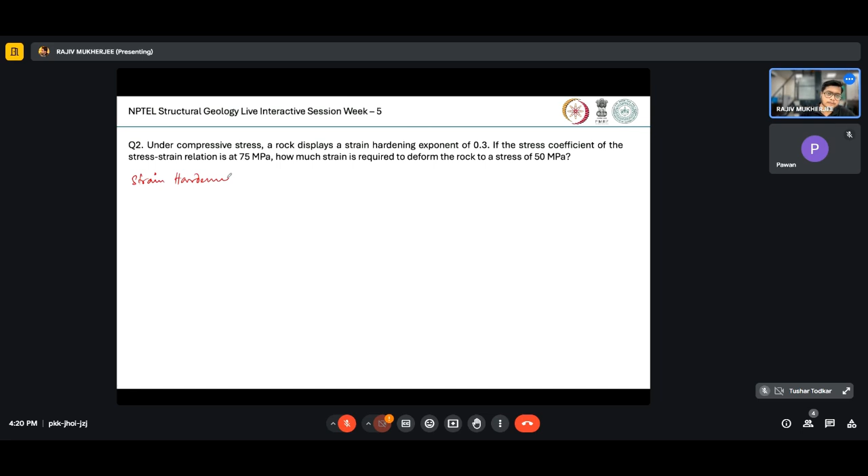The concept of strain hardening is that if I have a stress-strain curve like this, this is my stress, this is my strain. So up to the yield point, this is my yield stress, sigma y. So yield stress by definition is the maximum limit of elasticity.

So beyond the yield stress, a material should either rupture, meaning it will follow the brittle deformation path, where there will be a loss of cohesion, or it will continue to deform in the plastic deformation domain, where cohesion will not be lost within the material. It will essentially be a ductile material, but there will be a permanent change in the size and shape of the rock, meaning the deformation will be plastic.

So below the yield stress or yield strength of the material, all deformation is theoretically elastic. But if we go beyond the yield stress, the material will behave as a plastic material. For a plastic material, there can be three cases: the stress-strain curve can either go like this, or like this, or like this.

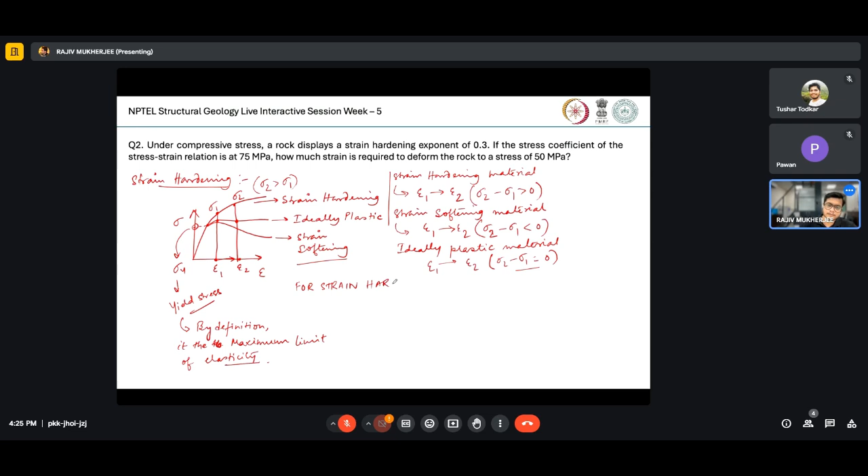For strain hardening materials, we see a relation: stress equals stress coefficient K times epsilon to the power n. This is the strain hardening power law relation between stress and strain.

Now we go to our problem, which says that under compressive stress, a rock displays a strain hardening exponent of 0.3, so n is equal to 0.3. The stress coefficient of the stress-strain relation is 75 MPa, so K has been given as 75 MPa. How much strain is required to deform the rock to a stress of 50 megapascal?

We have been given sigma equals 50 MPa, and we have to determine the value of epsilon. To do so, we take log on both sides of the equation, giving us log sigma equals log K plus n log epsilon. So log of 50 equals log of 75 plus 0.3 log epsilon, or log of epsilon equals... so what will be the logarithm value of 50? We have to calculate it. Keep in mind I am talking about log base 10.

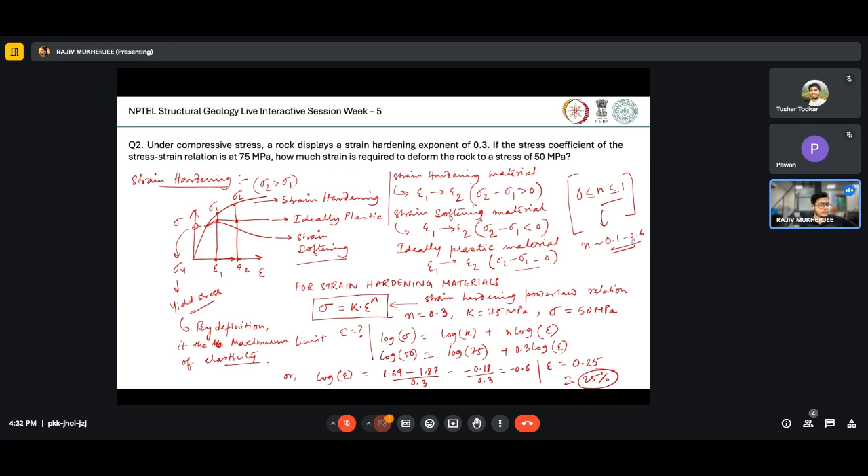Okay, so moving on to the next question, question number 3. It says that a rock having density of 2.7 gram per cc and bulk modulus of 4.5 into 10 to the power 10 Newton per meter square is subjected to compressive stress that produces a shear wave upon fracturing. The shear wave travels through the rock mass with a velocity of 3,800 meter per second. Find the Young's modulus of the said rock.

So in this case, we have to relate a formula to get the value. I remember in the previous discussion session we solved this kind of problem, but this one is more elaborate than that. So let us see what information we have been given.

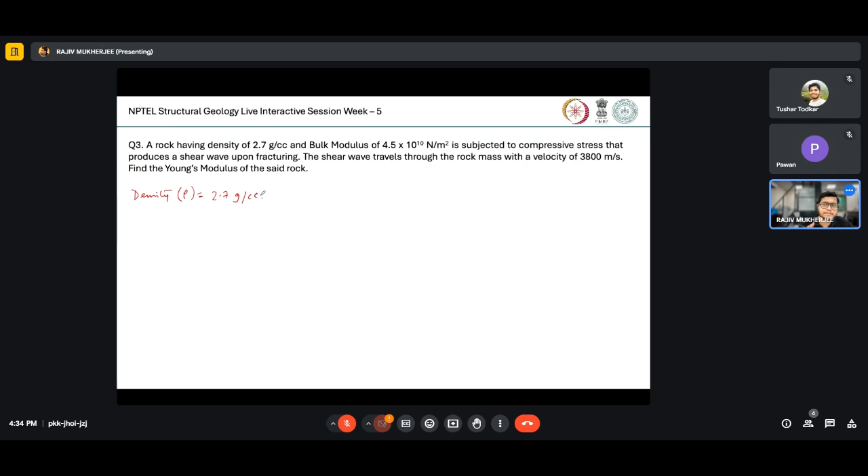So we have been given density rho as 2.7 gram per cc. Keep in mind that in competitive examinations, the problem given is often very simple, but the trick is to get the formula with uniform units and dimensions. You can see this density is given in CGS unit, 2.7 gram per cc, but the rest of the formula is given in SI. Solving problems with SI units is much easier than remembering the conversions between CGS and SI units. So let's convert the initial data into SI unit.

So 2.7 gram per cc means we have 2700 kg per meter cube. That is the density in SI. So the density has been given.

We also have been given the bulk modulus of the rock, which is K, 4.5 into 10 to the power 10 Newton per meter square, that means 4.5 into 10 to the power 10 Pascal.

And we have been given the velocity of the shear wave, Vs, that is 3,800 meter per second. So we know that Vs has a formula of square root of mu by rho, where mu is the rigidity modulus or shear modulus of the material. So we can determine the value of mu just as Vs square times rho.

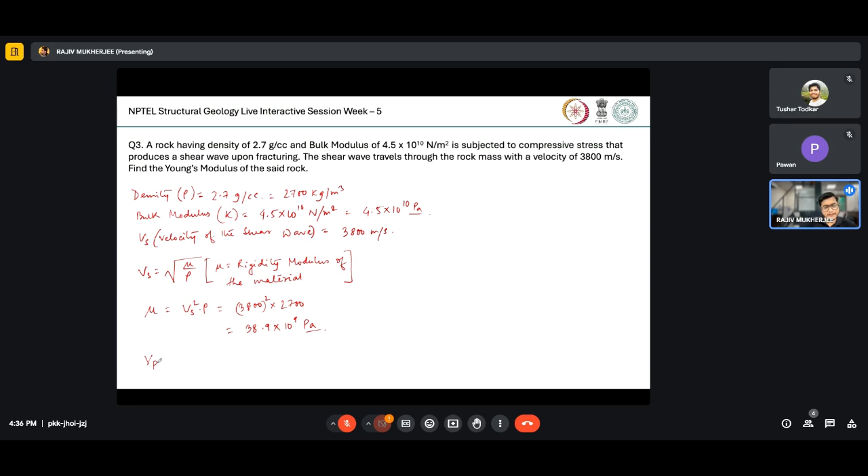Now we can use another formula for Vp, velocity of the P waves. Vp is written as square root of bulk modulus plus 4/3 of rigidity modulus, divided by density. So Vp you can calculate as the bulk modulus is 4.5 into 10 to the power 10.

Plus 4/3, that means 1.3 into 38 into 10 to the power 9, divided by rho, which is 2700. So 1.3 times 38 times 10 to the power 9.

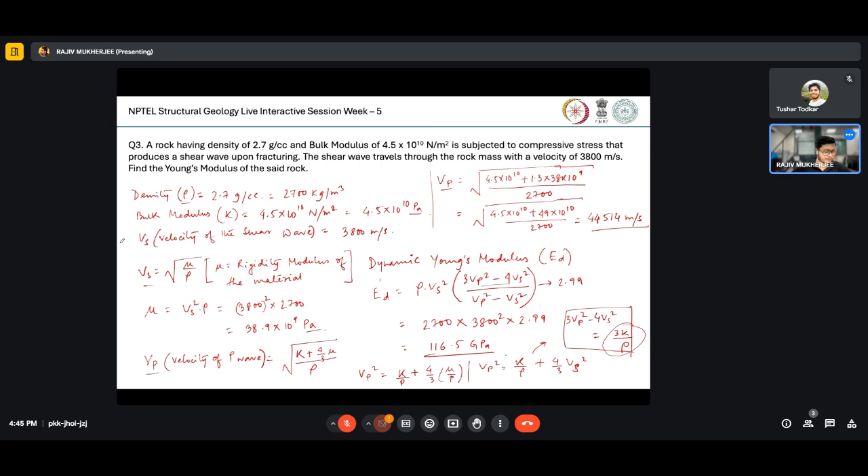Now getting to the fourth question. In a layered rock, if the viscosity of layer A, eta A, is larger than the viscosity of layer B, eta B, then upon compression, which structure will form? Option A: if layer A is surrounded by layer B, then layer A will form boudinage structure. Option B: if layer B is surrounded by layer A, then layer B will form folded structure. Option C: if layer A is surrounded by layer B, then layer A will form folded structure.

Sorry, it should be layer B surrounded by layer A. No, it is right, I just thought it's repeated. So if layer A is surrounded by layer B, then layer A will form folded structure. And finally option D: if layer B is surrounded by layer A, then layer B will form pinch and swell structure. So the question is saying we have two different layers.

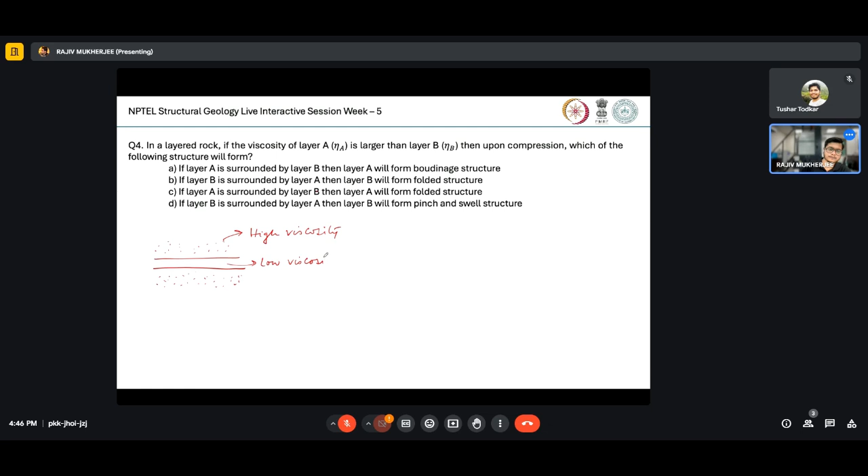One is the matrix rock we can consider, and another layer. So if this is high viscosity and this is low viscosity, then upon application of compression, we would see this kind of structure.

And if the opposite is the case, that a high viscous layer is sandwiched between two low viscosity layers like this—this is high viscous and this is low viscous—then upon compression, we would see that the layer has been folded like this.

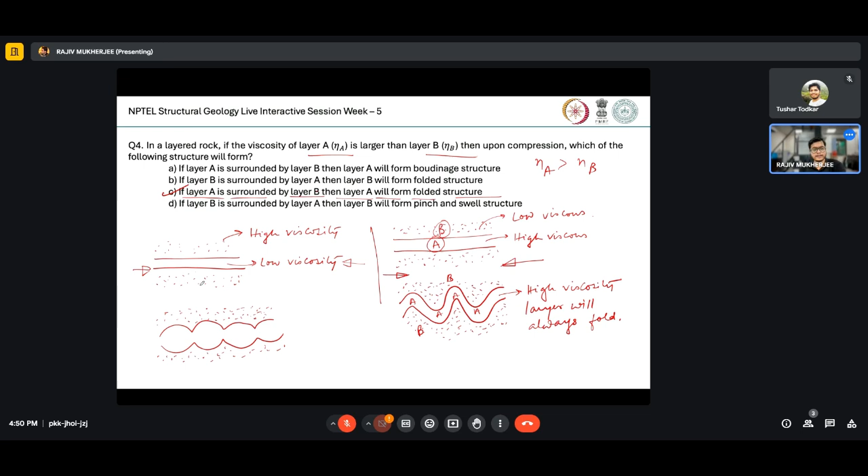Moving on to the next question. A rock has a tensile strength of 3.5 megapascals. If the angle of internal friction of the rock is 35 degrees, find the amount of resolved shear stress if the normal stress is 65 megapascals. So our job is to find the shear stress acting on a plane of particular orientation on the rock, given the normal stress is 65 megapascals and the tensile stress is 3.5 megapascals. So let us talk about Coulomb's fracture criteria.

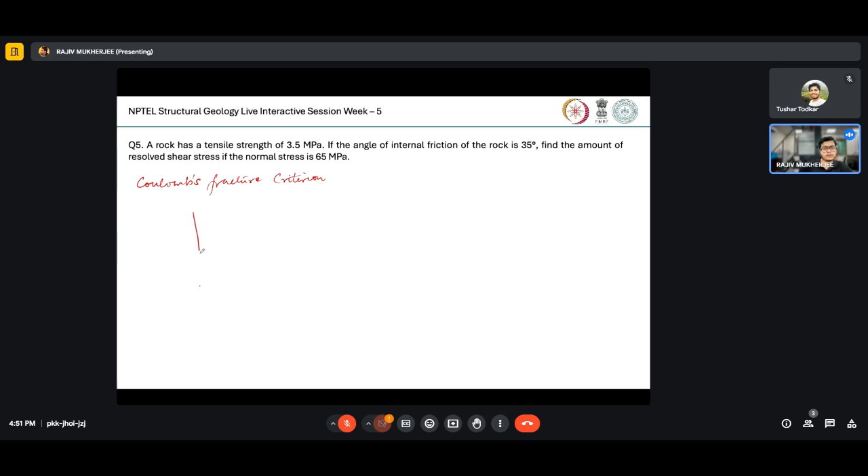According to Coulomb's fracture criteria, if I plot the shear stress and the normal stress along the y-axis and x-axis respectively, then the Mohr circle that we know - what is a Mohr circle? Mohr circle defines the state of the differential stress acting on a particular plane subjected to stress or external load.

The midpoint of this Mohr circle is the effective mean stress. This point is sigma 3, this point is sigma 1, and the maximum value for this envelope will be sigma s, which is the shear stress that acts on the plane, given that the plane has an orientation of 2 theta with respect to sigma 1. So that is the concept of the normal Mohr circle diagrams.

Now Coulomb said that an envelope or a tangent can be drawn by subsequently plotting the different range of differential stresses as Mohr circles, and if we just join the tangent to them, we will get a straight line with the following equation: sigma s equals some constant plus some slope times sigma n. So this is the equation of the Mohr envelope.

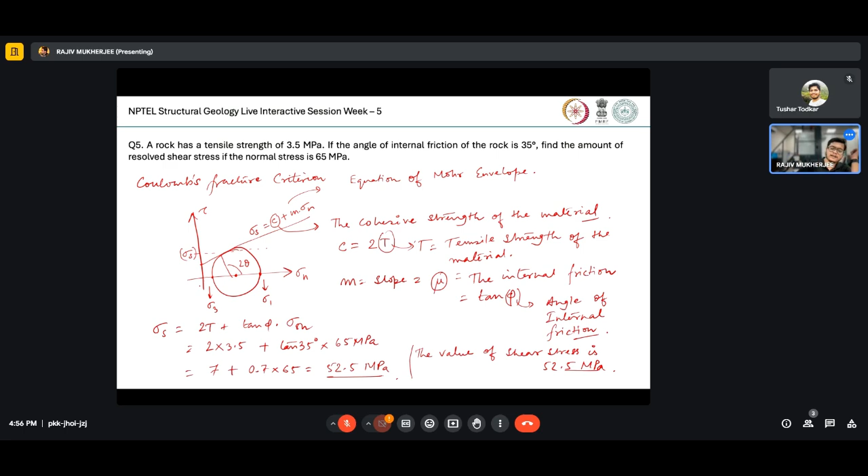Okay, let us move on to our next question. The sixth question says that an oceanic plate has an effective elastic modulus of 90 into 10 to the power 7 Newton per meter square, Poisson's ratio of 0.27, and average thickness of 5.5 kilometers. During subduction, calculate the bending stress per unit volume experienced by the plate.

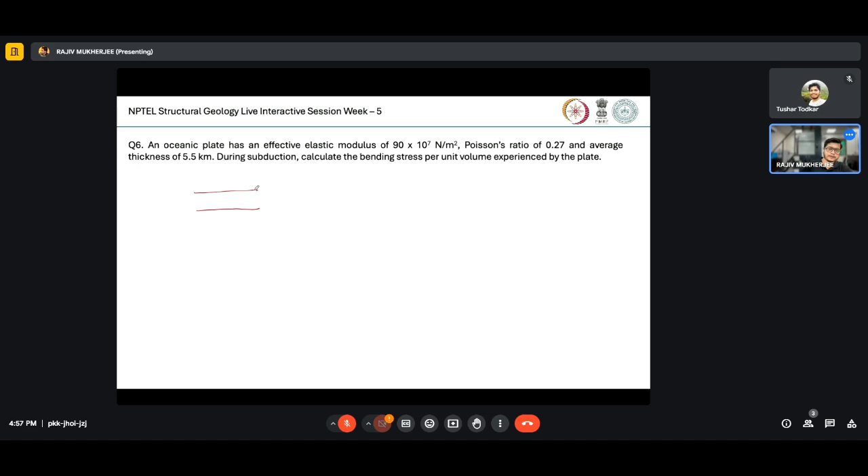This is a bit of a new concept for those who have taken this course - generally it has not yet been taught. A plate is by definition a rigid object, a rigid body. But when we try to model the process of subduction, we see that if this is the thickness of the plate...

We see that the plates are being bent at the trench. This is how the plates are being bent, and they continue to subduct. Of course, if the plate is much thicker, the curvature of bending would also become very high.

So we can say that bending a plate requires a bending moment. Bending moment means we need to apply a particular amount of force from some arbitrary distance of the plate, or a rod, or a one-dimensional object, to bend it. So we need a bending moment for that.

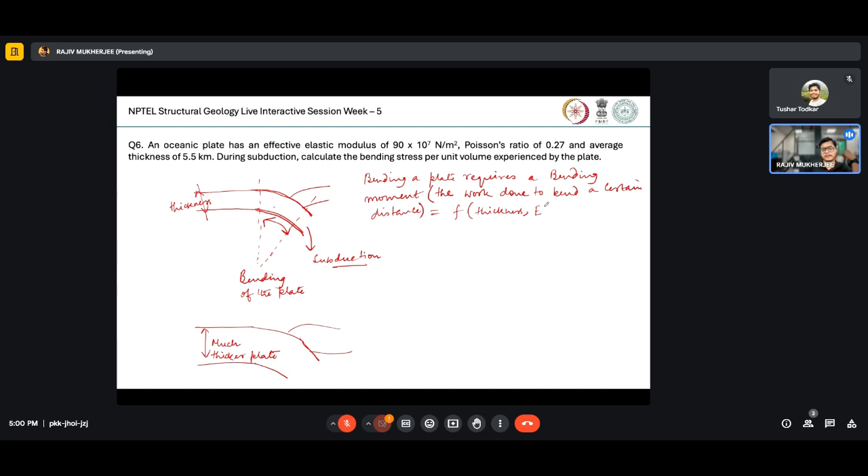The bending moment is basically the work done to bend a certain distance, a certain length, whatever. And this is a function of the thickness, the elastic modulus, and Poisson's ratio. All these three things are associated to each other, and only if we have the value of this elastic modulus, thickness, and Poisson's ratio, can we compute the bending moment of a plate.

The bending moment of a plate requires a certain stiffness calculation - how stiff a plate is, based on which we can say how much moment we require to bend the plate. So the stiffness of the plate, the bending stiffness, is commonly known as the flexural rigidity.

Expressed as D, it is given by a formula of elastic modulus, the Young's modulus, divided by 12 into 1 minus nu square, times h cube, and this has a unit of Newton meter. So this is the formula that we should consider for calculating the flexural rigidity of a plate.

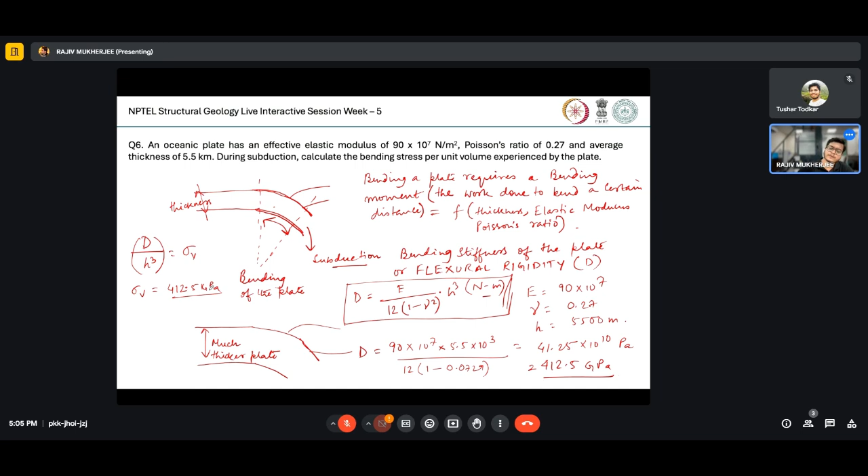Okay, moving to the next question. The question says that if the density of quartz is 2650 kg per meter cube and the density of orthoclase is 2550 kg per meter cube, the lithostatic pressure due to granite with 68 modal percentage of quartz and 32 modal percentage of orthoclase at a depth of 10 kilometers will be this much amount of kilobar.

So modal percentage means this is the volume percentage we're talking about, right?

So we need to calculate the bulk density of granite, and that would be modal percentage of quartz times density of quartz, plus modal percentage of orthoclase times the density of orthoclase.

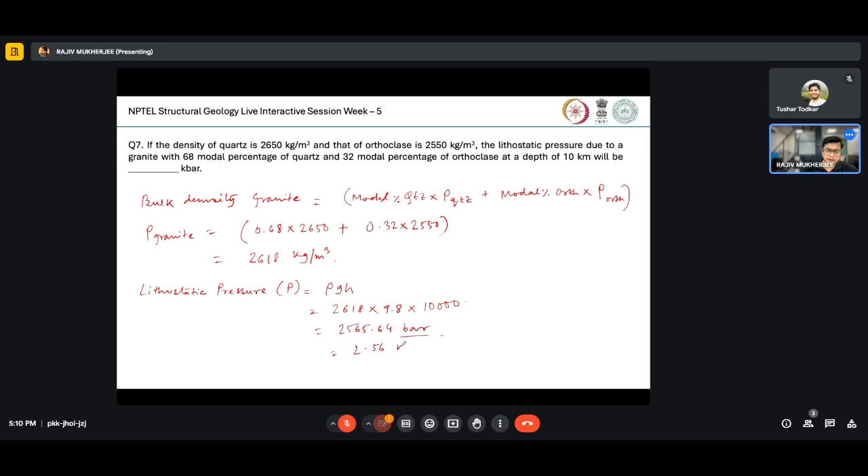So if you just calculate it, we get 2618 times 9.8 times 10,000. So it is around 2565.64, this much amount of bar. That means it will be 2.56 kilobar.

Okay, for using as information, you can write that 1 bar is equal to 0.1 megapascal, so 1 kilobar means 100 megapascal. This information is used to convert from the unit of megapascal to bar.

Okay, so this was the 7th question. We have some 8 questions left for today's discussion session, so let's just quickly go through them.

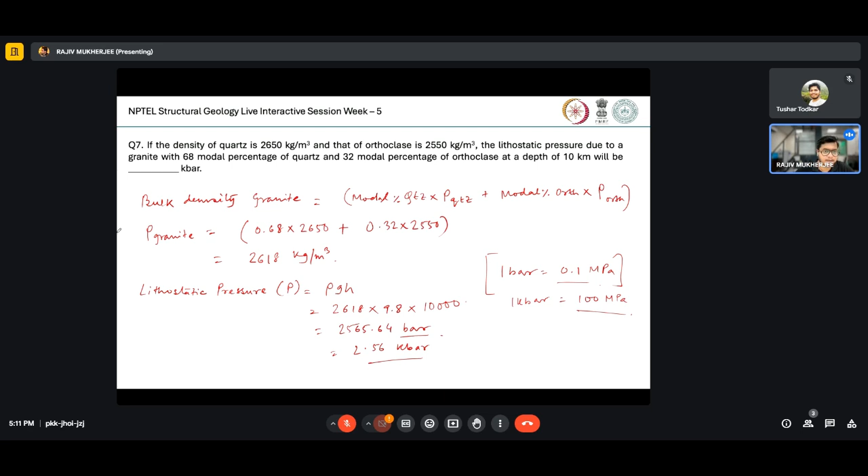The 8th question says that due to an event of deglaciation, a bent crustal depression is returning to its initial position through viscoelastic rebound and isostatic adjustments. If the thickness of the crustal plate is given as 40 kilometers and the average density and viscosity of the underlying mantle is 2.99 gram per cc and 2.8 times 10 to the power 22 Pascal seconds respectively, calculate the relaxation time of the underlying mantle given the wavelength of the crustal depression is thousand kilometers.

So this information is needed to calculate the relaxation time of the mantle. What happens is, say for example, there is a glacier. So this is the crustal plate, and we are assuming that beneath this lies the mantle. Now we had a glacier here, glacial mass, and that caused this crustal plate to bend like this.

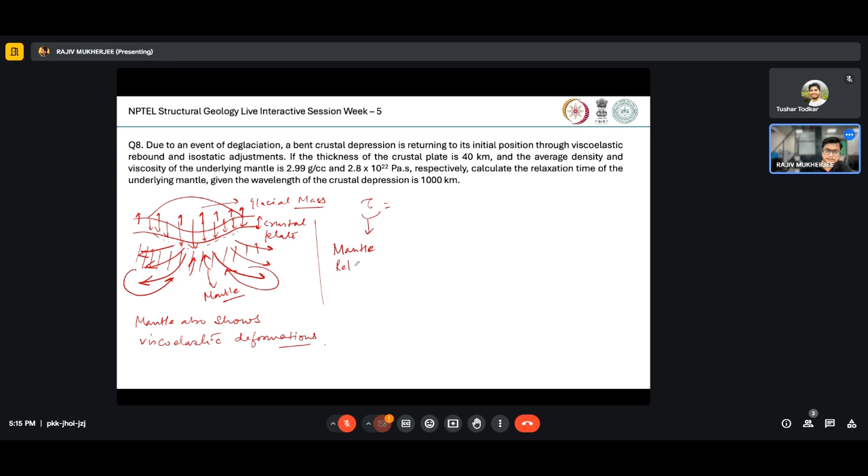To completely come back to the initial isostatic equilibrium after deglaciation, there's a straightforward analytical formula. If this is the relaxation time tau, the mantle relaxation time, tau is equal to 4 pi eta divided by rho m times g times lambda. Eta is the viscosity.

We have the value of 2.8 times 10 to the power 22. Rho m is the density of mantle, average density of mantle, given as 2990 kg per meter cube, and lambda is the wavelength of the crustal depression.

So if you just plug in these formulas, we can calculate tau as 4 into 3.14 times the viscosity, which is 2.8 into 10 to the power 22 pascal seconds, divided by 2990 times 9.8 times 1000 into 10 to the power 3, converting into meters.

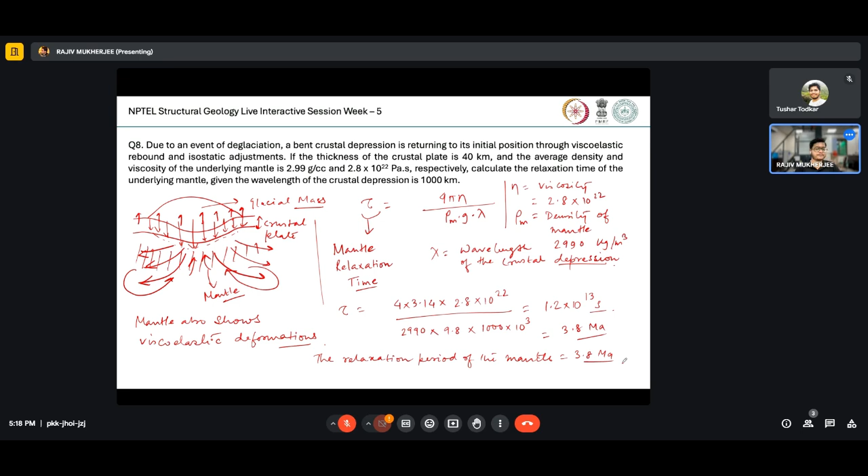Okay, moving on to question number 9. The seismic slip of a fault after earthquake is measured to be 0.5 meter, and the fault area is estimated to be 250 kilometers square. If the seismic moment during the rupture was 3.75 times 10 to the power 18 Newton meter, calculate the rigidity modulus of the rock. Also, if the density of the rock is 2.78 grams per cc, calculate the shear wave velocity that traveled through the rock during the rupture.

So we have been given information which is the seismic moment of the rock, which is 3.75 times 10 to the power 18 Newton meters. Also given is, apart from density, the rupture length of the fault and the contact area. So if I have a fault plane.

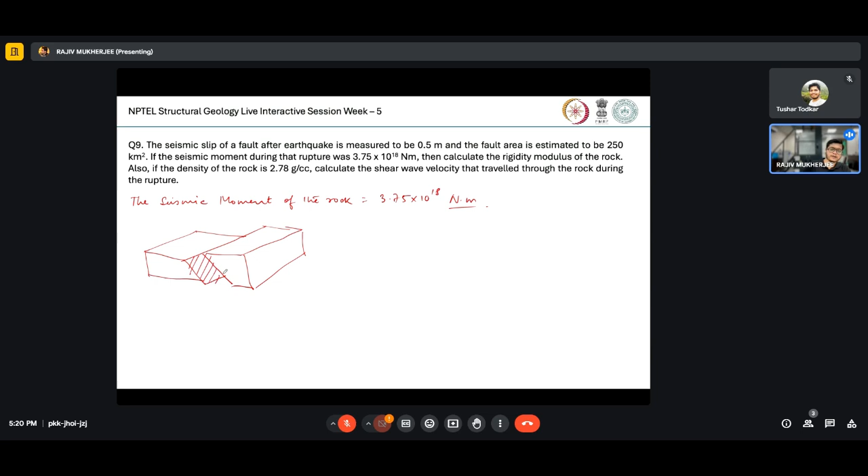If this is the new area produced because of the rupture, with dimension D and area A, this is the new surface area produced because of the rupture. So if you just calculate the moment based on this area, we can get the seismic moment.

As the rigidity modulus times A, area, times D, slip length. Together we get this formula for seismic moment. So seismic moment is essentially a function of the rigidity modulus of the rock type. Given all these values, we can calculate mu as the seismic moment divided by A times D.

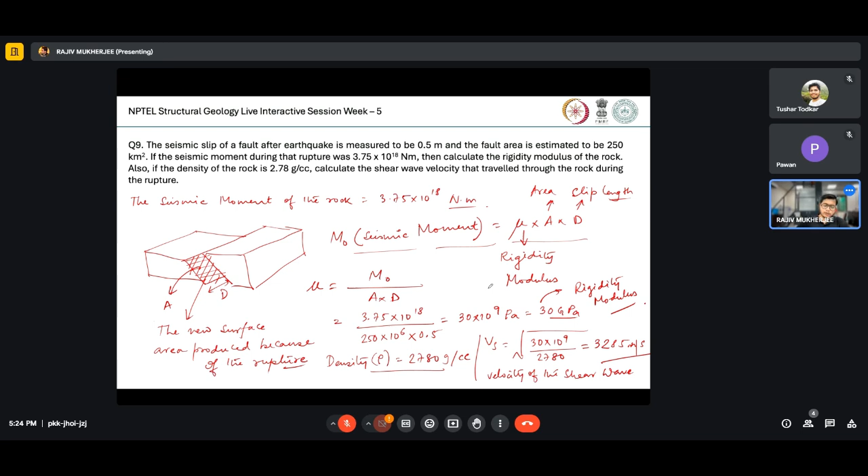Okay, moving on to the next question. Question number 10 says that a linearly viscous fluid requires 80 MPa shear stress to flow at a strain rate of 2 into 10 to the power minus 14 per second. Another elastic material, at room temperature, requires 40 megapascal to reach up to the yield point at an axial strain of 10%. Now, if these two materials are combined as a Maxwell material, find the strain rate of the system deformed at a normal stress of 100 megapascal with a rate of 1 kilonewton per hour.

So as we know, the Maxwell model contains the linear viscous component plus the elastic component, right?

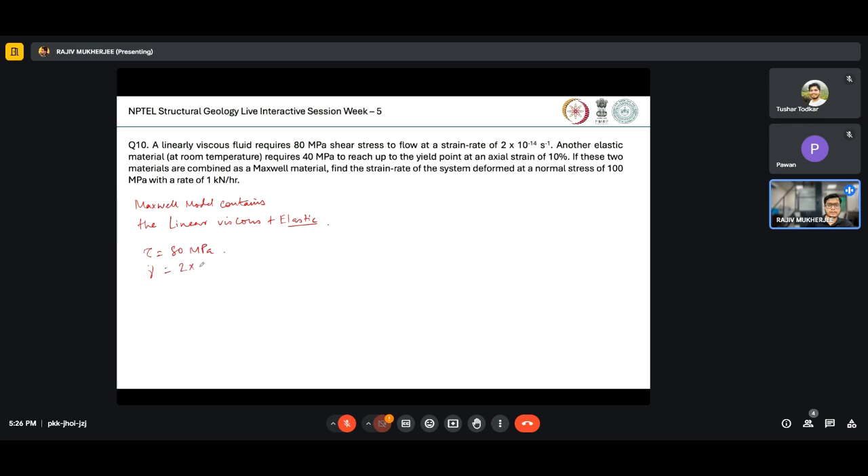Now first, for the viscous component, we see that the shear stress tau is 80 MPa and the shear strain rate has been given as 2 into 10 to the power minus 14 second inverse. So we know that tau equals 2 eta times shear strain rate. Therefore, eta equals tau by 2 gamma dot. That means we can calculate it as 80 into 10 to the power 6 divided by 2 into 10 to the power, sorry, this will be 4 into 10 to the power minus 14 second inverse. From that, we arrive at a value of 2 into 10 to the power 21 Pascal second. So this is the viscosity of the material.

For the elastic material, we know the relation sigma equals E times epsilon, right? So E is sigma by epsilon. Now sigma given is the yield point, which is 40 megapascals, meaning 40 into 10 to the power 6, right? And the strain is 10%, that means 0.1. So ultimately, the elastic modulus or the Young's modulus of the material will be 4 into 10 to the power 8 pascals. Okay?

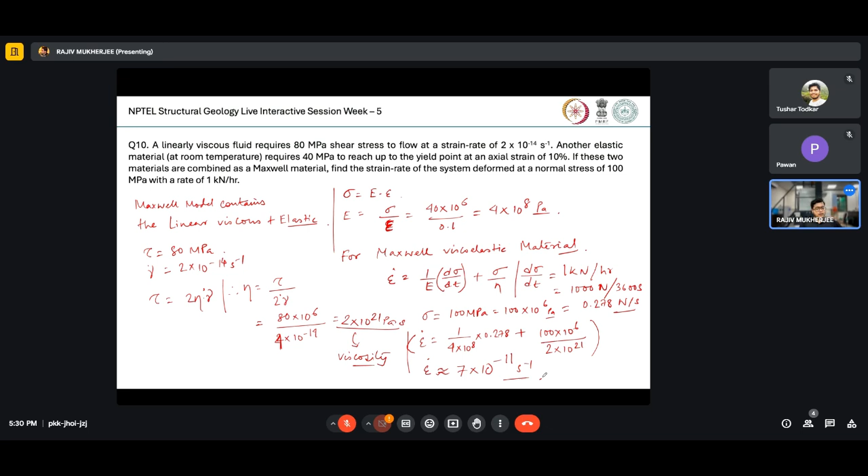Okay, moving on to our next question, question number 11. Upon increasing the shear rate, a material that shows non-linear increase and decrease in apparent viscosity are called: option A, viscoelastic and thixotropic respectively; option B, rheopectic and thixotropic respectively; option C, Bingham and viscoelastic respectively; and option D, Bingham and rheopectic respectively.

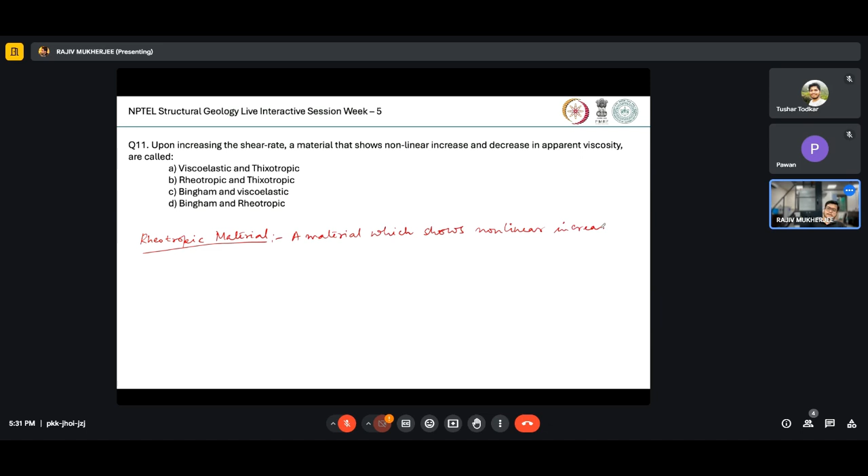So for this, we just need to know some information. A rheotropic material is a material which shows nonlinear increase in apparent viscosity with time, for which a constantly increasing shear rate is applied.

Okay, so this is called a rheotropic material, and thixotropic material is just the opposite of rheotropic materials. So for the definition of thixotropic materials, it will be a material which shows nonlinear decrease in apparent viscosity with time, for which a constantly increasing shear rate is applied.

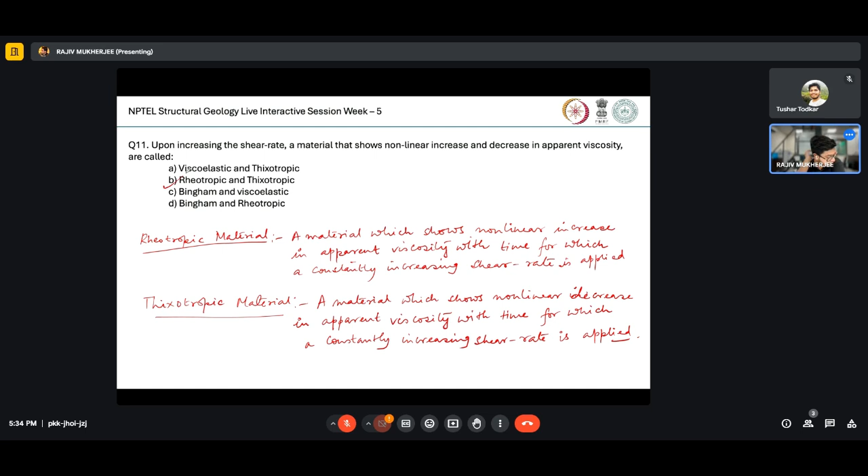So question number 12 says that a density log for a region gave the density of the formation fluid and the rock matrix to be 950 kg per meter cube and 2540 kg per meter cube respectively. Also given the bulk density of 1950 kg per meter cube. If the pore pressure is related to the porosity in the form of sigma p is equal to 6.56...

It will be plus, I guess. So if the pore pressure is related in the form of sigma p is equal to 6.56 plus 8.5 times phi square, where phi is the porosity, then calculate the effective mean stress of the porous rock at a depth of 5 kilometers.

So the information we have been given is that the pore pressure sigma p is 6.56 plus 8.5 times phi square. Phi is the porosity. So we have to calculate the effective mean stress at a depth of 5 kilometers for this porous rock.

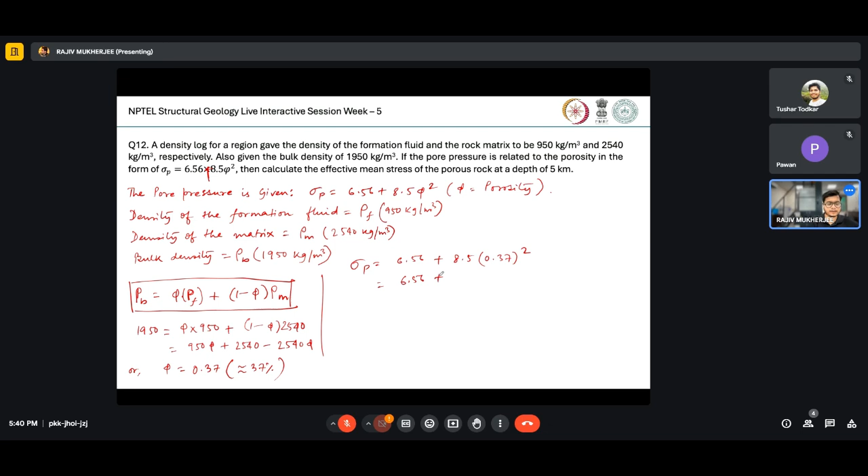That means 37% porosity. So we have got the value of phi, and then we can put it in the given formula: sigma p is equal to 6.56 plus 8.5 times 0.37 square, which equals 6.56 plus 8.5 times 0.37 squared, giving 7.72.

So 7.72 megapascal is the value of the pore pressure. Now, the density of the bulk rock is 1950 kg per meter cube, so we can use this density to calculate the lithostatic pressure.

So the lithostatic pressure sigma 0 is rho B times G times H. Rho B is 1950, times 9.8, times a depth of 5 kilometers, which is 5000. So 1950 times 9.8 times 5000 is around 95 megapascal.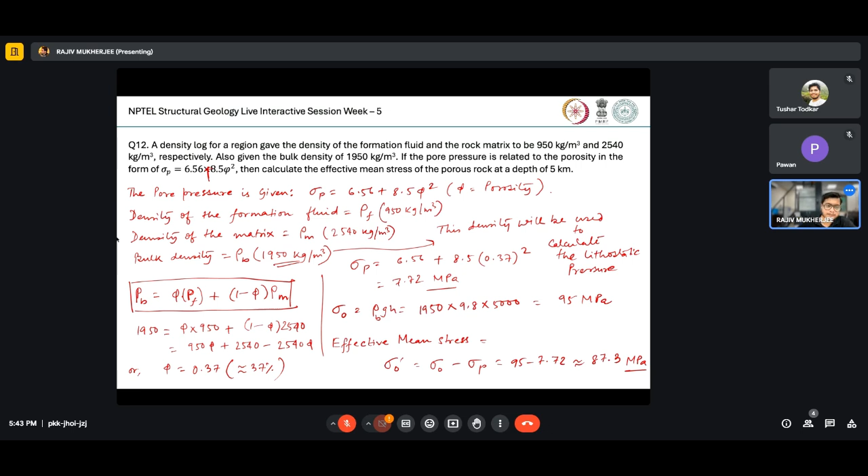Which of the following properties of a rock with fluid filled cracks would best represent its rheology? Option A, elasticity. Option B, plasticity. Option C, viscoelasticity. Option D, linearly viscous.

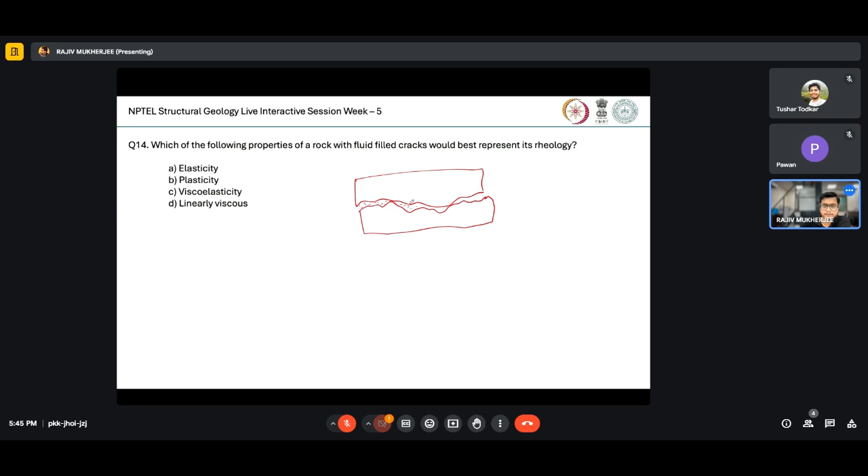So for example, if you have a rock with a crack, and you have fluid in it, the fluid will obviously be viscous. And the rock, considering a shorter window of deformation, will behave as elastic. That is why elastic waves, meaning seismic waves, can pass through rocks, because in shorter duration every rock can behave as an elastic material.

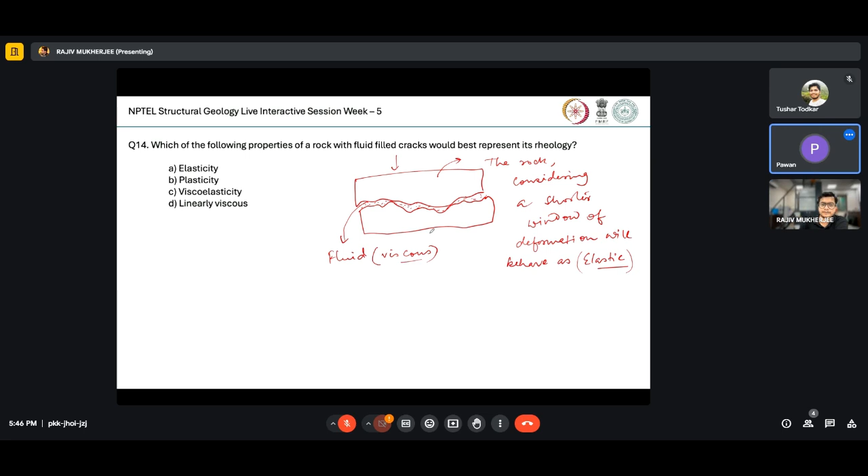So of course we have a viscous fluid and an elastic rock. Together, if we just try to deform them, the deformation will be viscoelastic in nature. Sir, that's right. Yes.

That will be viscous, but the temperature of the fluid will also govern some behavior. If it's hydrothermal temperature, a different temperature, the nature will be different. The way the temperature is dissipated into the rock will matter. In case of high temperature fluid, the dissipation time of heat into the rock and its composition, essentially the melting point, will control the rheology.

Okay, as per control, it will affect the rheology. Yes, it will affect the rheology.

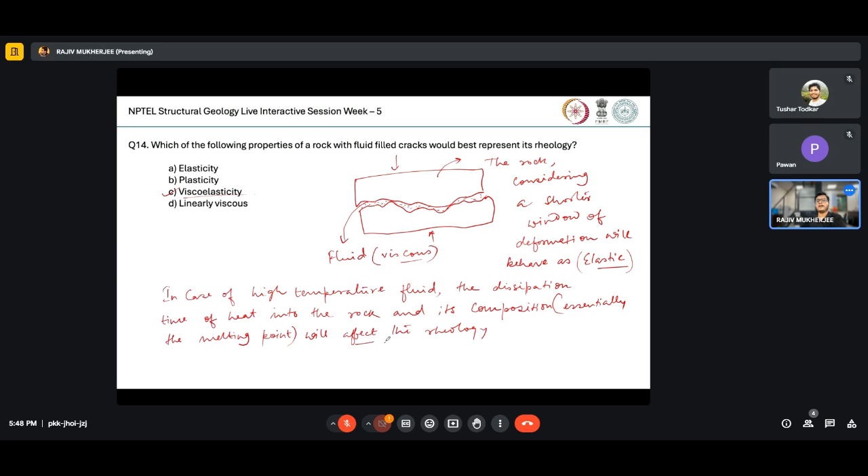Moving on to the last question for today's discussion. The yield strength of a rock at Earth's surface is 50 megapascal. The rock shows a stress temperature pressure relation as follows: sigma is equal to 1.5 sigma 0 minus 1.7 times 10 to the power 6 divided by del T square, plus 3.1 times del P cube. For a normal geothermal and geobaric gradient inside Earth, find the strength of the rock at 3 kilobar pressure. Consider pressure in kilobar and temperature in degree centigrade in the empirical equation.

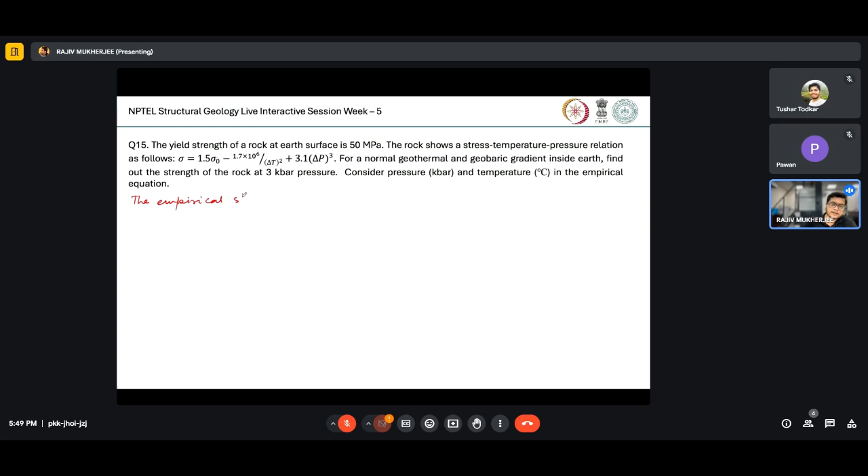So we have been given an empirical equation which is in the form of the stress temperature pressure relation: sigma is equal to 1.5 sigma 0. This is the initial yield strength of the rock. Minus 1.7 into 10 to the power 6 divided by del T square, plus 3.1 del P cube.

Now it has been told to consider normal geothermal and geobaric gradient. So what is the normal geothermal gradient? The normal geothermal gradient, dT/dh, is 25 degrees centigrade per kilometer.

And normal geobaric, that means pressure gradient, dP/dh, is 0.3 kilobar per kilometer.

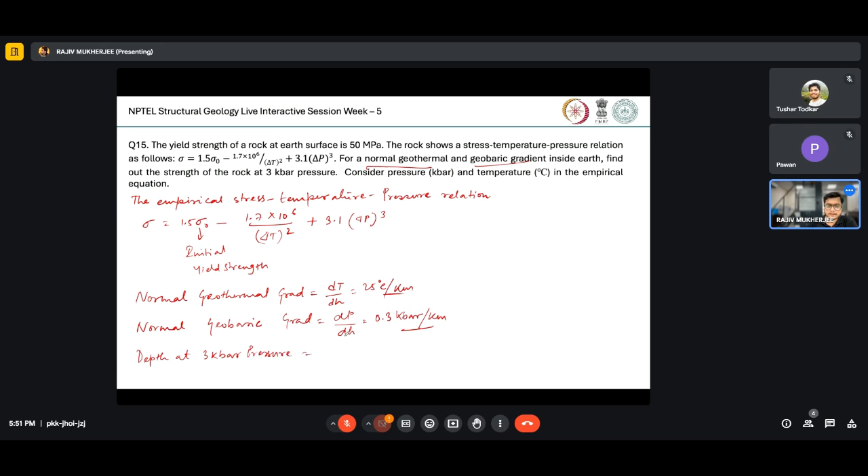So depth at 3 kilobar pressure will be found by dividing the total pressure by this 0.3 gradient, which gives us the depth of 10 kilometers. So we know that at 3 kilobar pressure, the depth is 10 kilometers.

Now, if we use the temperature gradient, del T will be 25 (the gradient) times 10 kilometers, minus the surface temperature which is 25 degrees centigrade. That means we get 225 degrees centigrade. So this is the temperature at 10 kilometers of depth.

And this is the pressure at 10 kilometers of depth, because the pressure at Earth's surface is negligible compared to the pressure at 3 kilobar. So we can consider del P is equal to 3 kilobar, and del T is equal to 225 degrees centigrade.

So if we plug in the values, we get 1.5 times 50 minus 1.7 into 10 to the power 6 divided by 225 square, plus 3.1 times 3 cube.